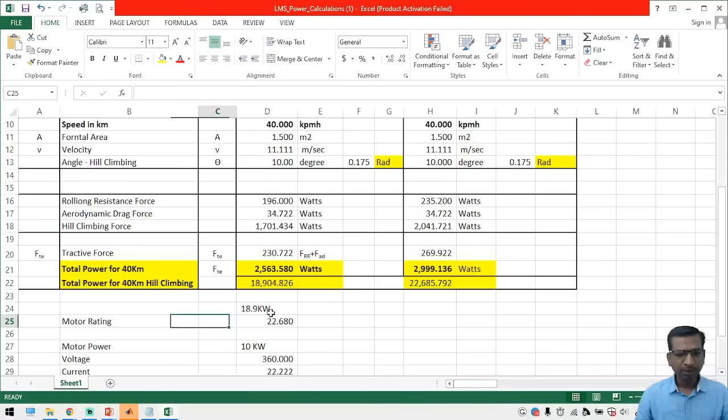As per our calculations, we need 18.9 kilowatt as the motor power requirement, right? So we need 18.9 kilowatt. In that case, how to choose the motor? It should be about 20% higher than this requirement, like 1.2 times 18.9. So this is the exact motor requirement. The motor rating for our requirement is 22.68 kilowatt; that motor we have to keep.

If you keep this 22 kilowatt motor, the entire vehicle can move with its help. Now, are we going to consume the entire 22 kilowatt in this EV for the entire travel time? No, we won't consume the entire 22 kilowatt. Then how do we consume the motor power? Let us understand this. There are two types of loads, right? So how will you consume the load?

Actually, with instantaneous power, sometimes it will be, let us assume, 50 percent. Sometimes you may go to 20 percent, sometimes 100 percent. This is called instantaneous power; let us take it as dynamic power. Instantaneous power is how much power you consume at a particular time. Power is the product of voltage and current, right? When you change the PWM, we can change the voltage, and at the same time we can change the current also. That is the closed loop control mechanism for motor control.

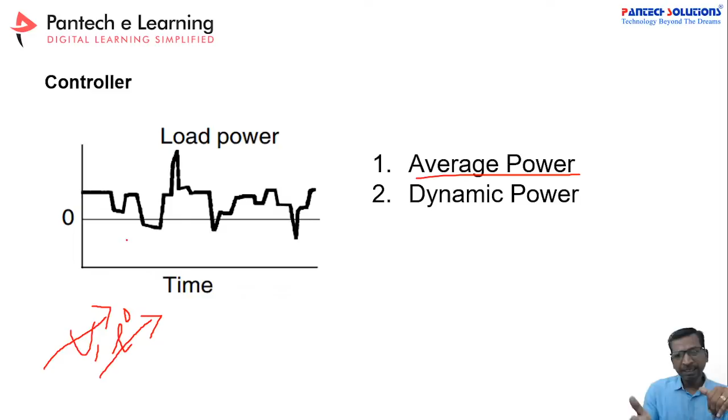Now if you average the power over the entire travel time, it will be like a summation of the entire dynamic power. To understand the average power and dynamic power, people use the drive cycle. In MATLAB Simulink you will get a drive cycle. In the day one class I showed you a reference speed and actual speed. Similarly, just a second, I will show you one more graph. This is called a drive cycle, a standard drive cycle. Based on road conditions and driver data, they have given us a drive cycle.

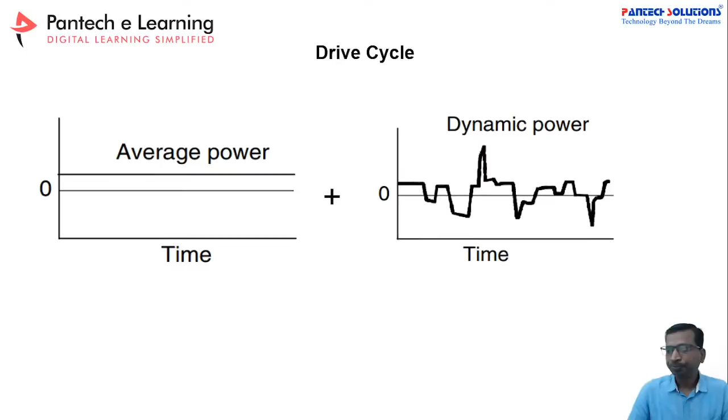So now, how has this motor in a conventional vehicle and the IC engine been connected? Generally, there are different types of hybrid methods. In the earlier stage, there is the IC engine part and then the electrical part. This is called the series hybrid mechanism. Anyhow, the transmission mechanism will be used to transfer the mechanical power, right?

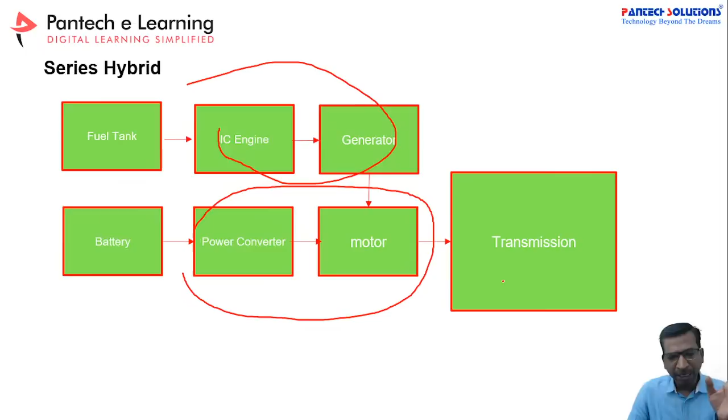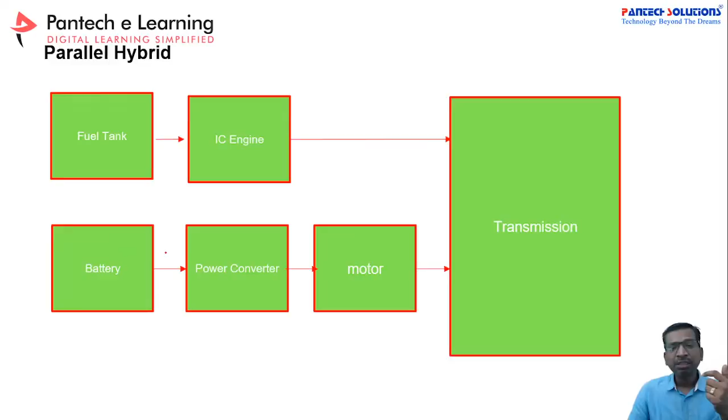Similarly, the parallel mechanism. The IC engine will apply power separately, and the electrical power will apply separately. So the driver can take a call on how the things need to be connected. Similarly, you can go for the series and parallel hybrid methods also. So first one is the series, the second one is the parallel, and now this is the series and parallel.

Frankly telling, by combining this hybrid technology, you are increasing a lot of complexity. Now a lot of latest technologies are available to convert a vehicle into a computer. So it will be like a high-end robotic, high-end computer on the wheel, right? That kind of technology is available.

To understand those concepts, you must know very clearly about the battery, power converter, and motor control. Here the power converter will play a role through controlling methods with the PWM, right? So now are you ready to learn the concepts of the PWM?

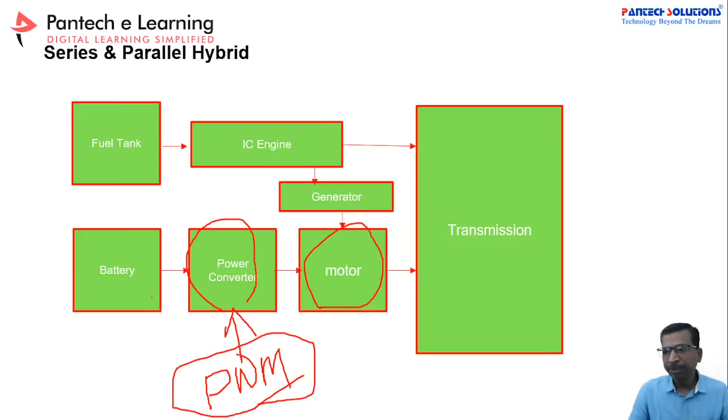So now let's move to the power electronics block. Before getting into power electronics, I should give you the PWM. See, this is yesterday's question.

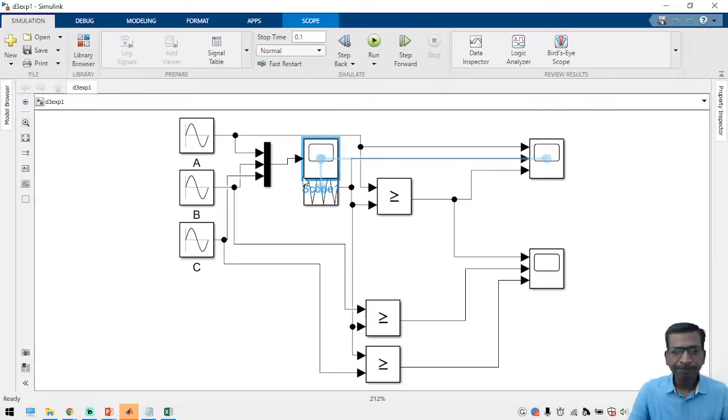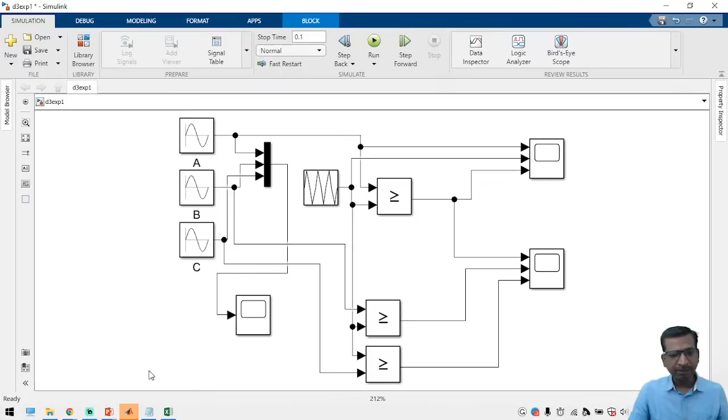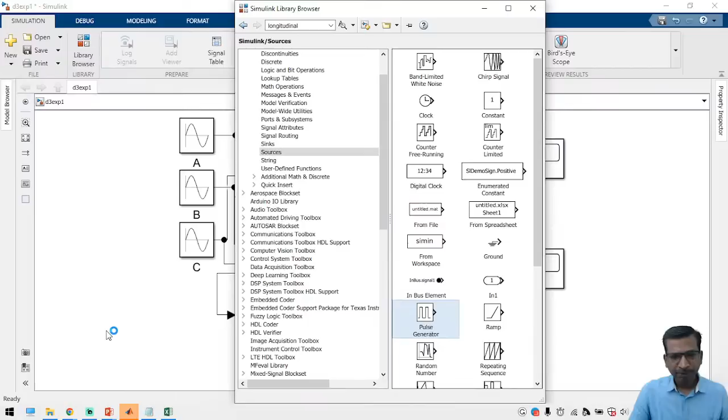So now let us move to another type of waveform. This is called a square pulse. For generating the square pulse, again just open the library browser. Just go to the sources and take a pulse generator block, right? Just select the component and keep this component in your workspace.

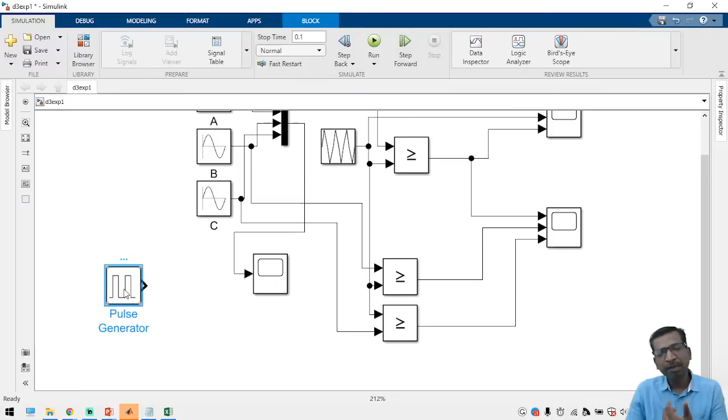Right. So now we have taken the pulse generator. This pulse generator will help us to generate a square pulse. From that square pulse, we can understand how the PWM can start and how the PWM can be used. This is called the basic PWM method. So here the pulse generator will help us to generate a square pulse, right?

This is the time axis; this is the y-axis, and this is the x-axis. Here we are just developing the square pulse. This is the square pulse, right? Now this period is called on time, and this period is called off time. The summation of turn on time and turn off time is called the total time period, right?

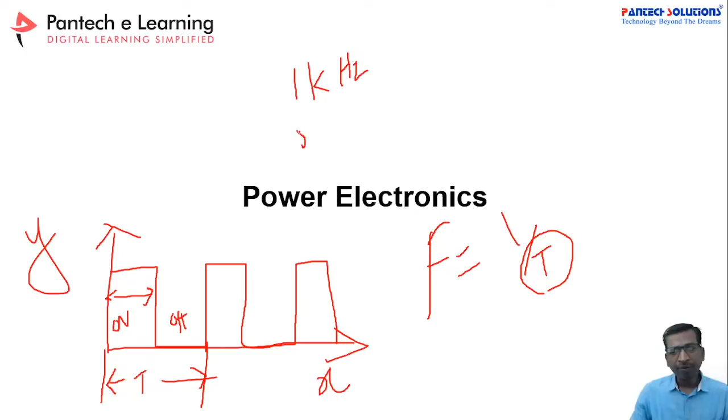So now if you take a 1 kilohertz frequency and a 50 percent duty cycle square pulse. Let's assume this is 1 kilohertz. So 1 kilohertz means the time period is equal to 1 by f, right?

For f is equal to 1 by T. So likewise you can calculate the total time period, and if you want to generate a square pulse, then the duty cycle must be 50 percent. Duty cycle must be 50 percent.

So let us take this graph. Now we are just trying to develop a square pulse. Here the period is nothing but a time in seconds. So here you have to mention 1 by the frequency, right? So 1 by f. Here frequency is 1e3, 1 kilohertz.

And after that, pulse width. If you keep here 50 percent, then the square pulse will be there. Keep 50%, then you will get a square pulse. Just apply here and try to understand the square pulse. Just change the layout. Just give me a second. Yes. So now just try to run this simulation.

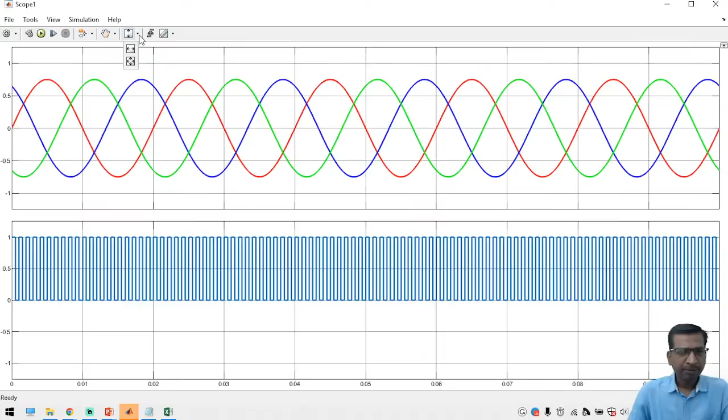Here we are getting the square pulse, right? I will increase the value of the graph. See here, 1 kilohertz is the frequency of this square pulse. So exactly 50% is the on time, and 50% is the off time, right?

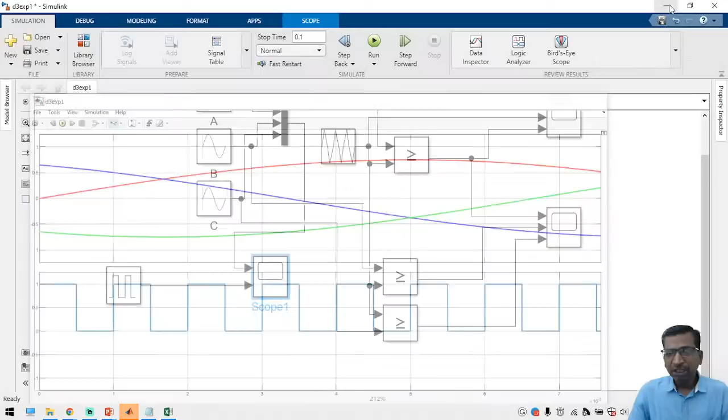So now, if you want to change the duty cycle, you have to change the value here. Instead of 50, if you apply 25 percent, then 25% will be the on time, and the remaining 75% will be the off time. So like that you can change the PWM.

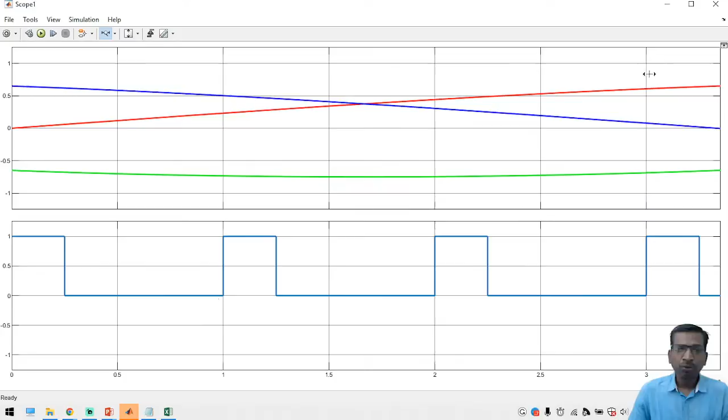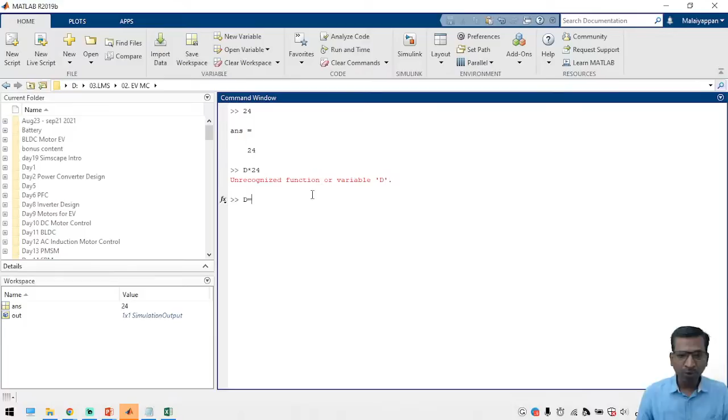So now the logic is, the output voltage: for example, if the input is 24 volts, output will be the duty cycle into 24 volts, right? Now we have kept D as 25 percent, which means a 0.25 value. So the output will be D into 24, approximately 6 volts output voltage.

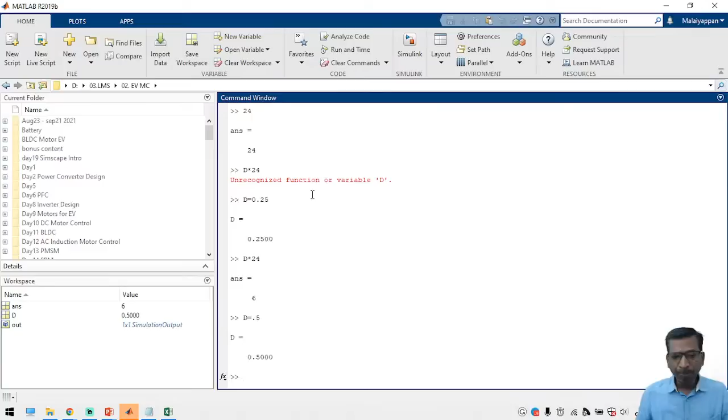Now you have a choice to change the duty cycle. If you change the duty cycle to 0.5, then output will be D into 24. So exactly you will get 12 volts. So by this method we can change the voltage.

How you can change the speed of the motor, I will tell you in the next experiment. By changing the input terminal voltage, we can change the speed. So obviously this is the very basic speed control technique. So now you are in the position to change the output voltage. Theoretically, if you change the duty cycle, you can change the terminal output voltage.

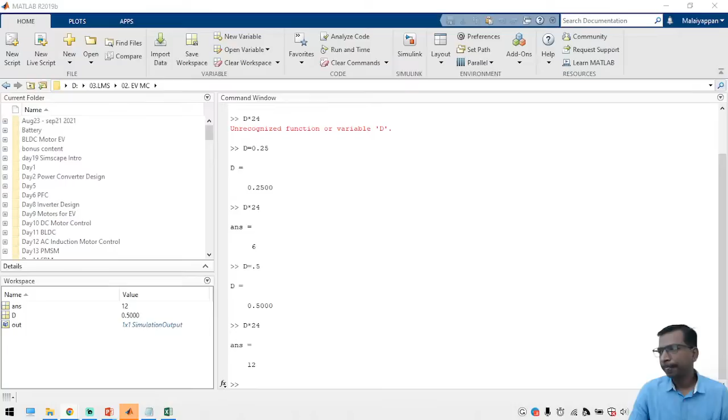For the three phase, we need 120-degree phase shift. Right. So now let's move to the next topic. So actually, we have covered the basic waveform generation. So here with the waveform, how we can control it.

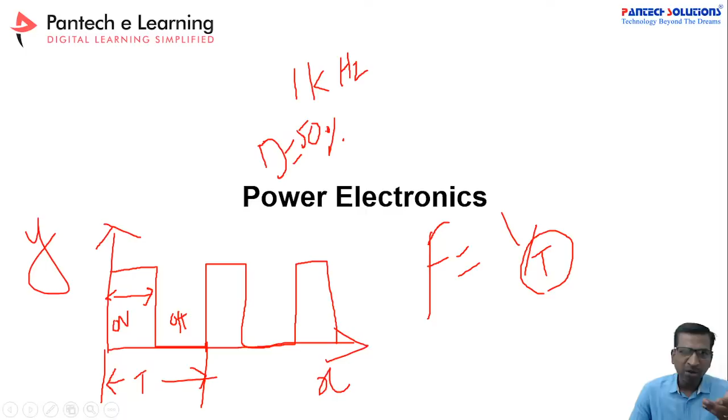So for controlling the output voltage, you must know what is power electronics. So as of now, just keep this point in your mind. Power electronics is the application of solid state electronics to control and convert the electrical power, right? Which means that here some logic will be there. So here we are applying the input, and here we are taking the output, right?

So here we will apply a PWM. So this logic will be based on the solid state devices. I will tell you what the solid state devices are in the next classes. So just keep in mind, here we are using some electronic circuit to convert the input power to the output power with the help of PWM control.

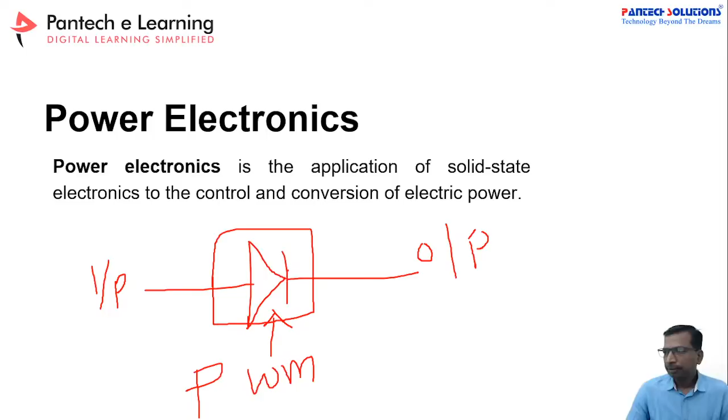Now you must tell me what is the difference between basic electronics and power electronics. Do you have any idea about it? What is the difference between basic analog electronics and power electronics? I'm just waiting for your reply.

High voltage in power electronics. Exactly, Mr. Lokeshwara. The basic electronics will handle up to a maximum of 12 to 24 volts. Whereas if a particular circuit handles more than 24 volts, everything comes under the power electronics domain.

Now you must know the basic components of power electronics. As we know, a transistor: BJT, JFET, and then MOSFET. These are all electronic devices, and they're called solid state devices. And how can you break the circuit? If you have a breaker in the circuit, you can easily break it. That's a manual breaker, right? If you manually lift the breaker, the circuits will be isolated from each other.

Similarly, you have another kind of breaker called a mechanical relay. If you apply a control voltage to the relay, then the contact will get removed on this line. So that is called a mechanical relay. Similarly, electronic relays are available. That is called solid state electronics.

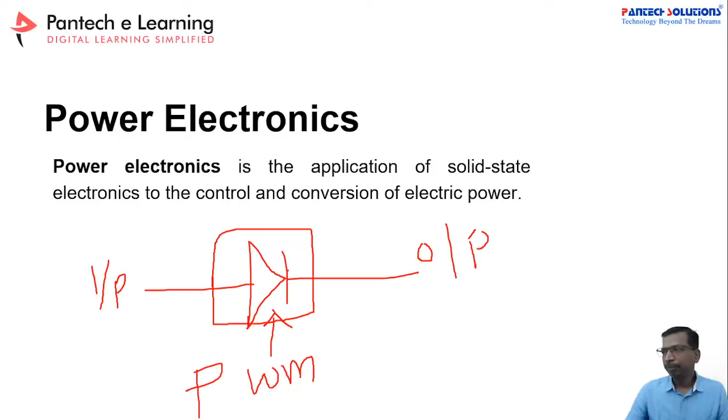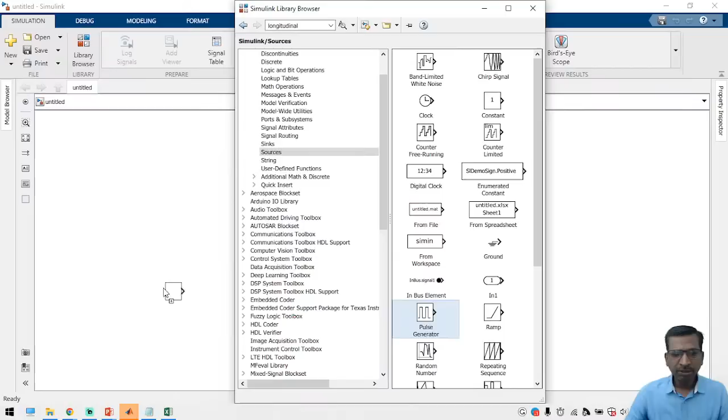Now let's move to the next experiment, and let's have a counter design. I will show you one counter design. Then we can go for the motor control, right? So how can we count the pulse? Let us take the same square pulse, and the time period is 10 seconds. So now we have to convert the square pulse into exactly 50 percent, right?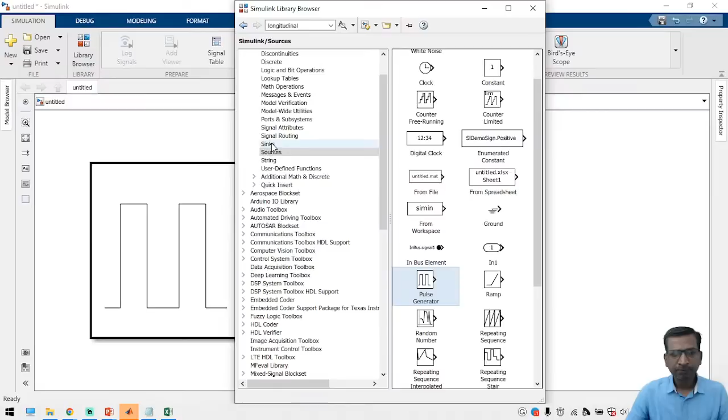Right. So 10 seconds we are going to run this one. So just take the scope. Where will you get a scope? Here, just take the scope and connect the scope, right? So if you run this, you run the scope, you run the simulation. See here, you can get square pulses, right?

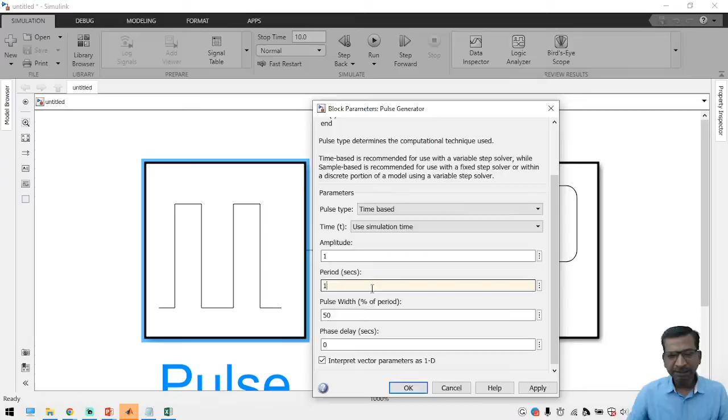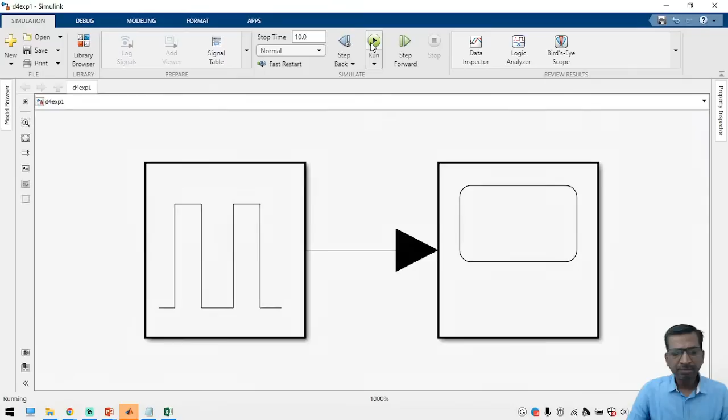So now I'm just going to reduce the time period. So for the 1 second, one pulse should generate, right? Just save the simulation, and now you can run the simulation. See here, we are getting the 10 pulses. So this is pulse 1, and then pulse 2, pulse 3. For 10 seconds we are generating pulses, right?

So now, how can you measure the motor speed? Do you have any idea how you will measure the motor speed? So in the motor shaft, you should have a sensor. That sensor will give you the square pulses. So now electronically you have to count the pulses, right?

So the tachometer is an instrument. That instrument you cannot use in your control algorithm. So you should have an electronic circuit, and generally we will use an optical sensor, generally called a speed sensor. If you keep the speed sensor on the motor shaft, the sensor will give you the square pulses. So you have to develop a program in the microcontroller. That controller should measure the speed, the number of pulses in a particular time. For that reason, you need a counter program, right? So now we are going to use the counter logic.

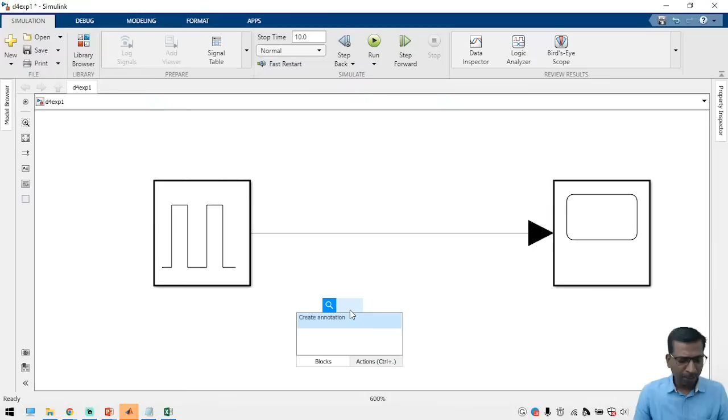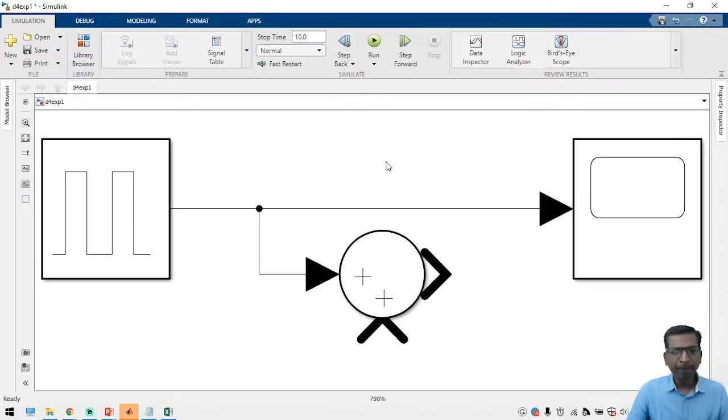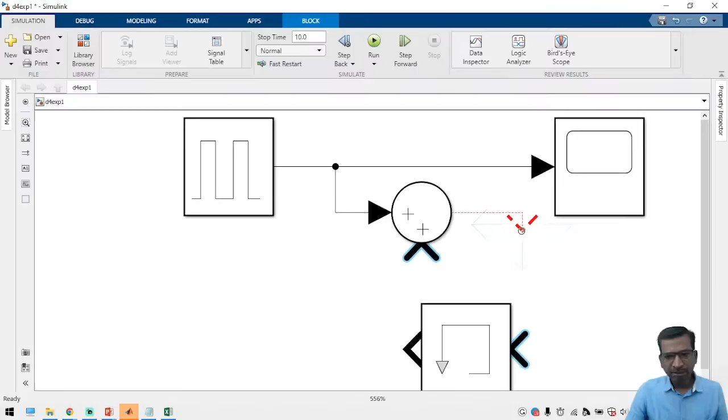So how can you measure the pulses, right? So here take a sum block, connect it here, and take one more block called memory. Take this memory block, rotate the block, and connect it here. Now we can measure the number of pulses, right? Take a display block.

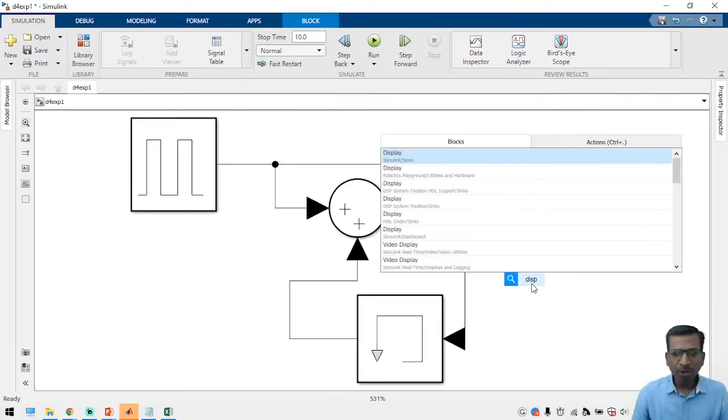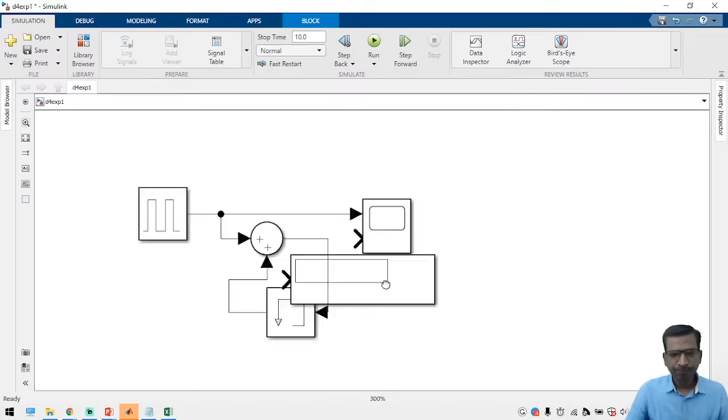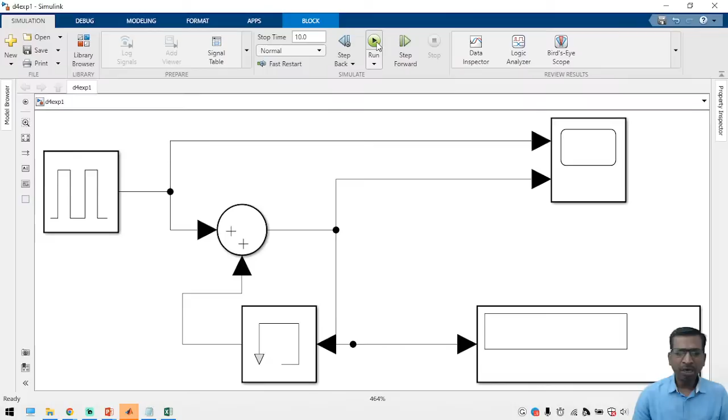So now we are going to measure the pulses. How can we measure the pulses? Please wait, I will tell you. Change the layout so you can easily grab the results, right? Just try to run this one. It will give you a random value. So here we have to change the sample time. I will tell you how to change the sample time. Run this. Here the program is counting some value, but this is not the exact one. So now you have to adjust the sample time.

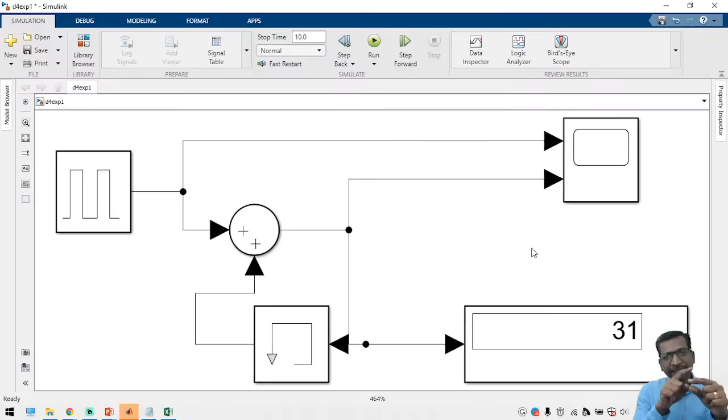Generally in the electronic circuit, the ADC, that is the analog to digital converter, is used to measure real-time parameters, because the motor speed is a real-time parameter. In that case the sample and hold parameters may be involved in your algorithm, right? So what do you mean by sample? If you take a continuous signal, you should identify this is one pulse and this is another pulse. If you take 2 samples per period, then you can easily identify the logic. If you take the sample at this moment and at this moment, you can easily calculate the pulses. If you increase the samples within this second, it will give you a faulty result.

So now I am just going to adjust the sample time period. How can you adjust the sample time period? Again, just go to the configuration parameters and here change the fixed step.

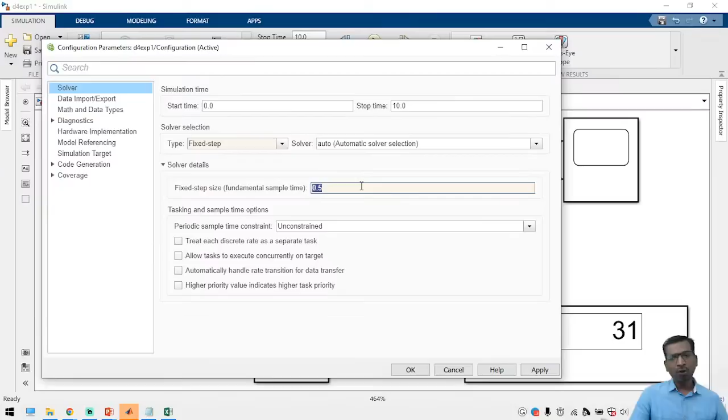Here you have to change the sample time. As per our design, 1 second is the time period. If you keep the sample time as 0.5 seconds, that is enough to identify the logic. Now we are getting 31, but by default it's only 10 pulses.

Now we are getting 11, so the next pulse is also going to be calculated. For that case, you have to run this simulation for 9.9 seconds.

To run this, you will get exactly 10 pulses: 1, 2, 3, 4, 5, 6, 7, 8, 9, 10. So this block will give you the exact value of 10.

So by this method, you can develop the logic to measure the speed of the motor in real time.

Can you just tell me what is the confusion? I will try to answer your question. Just share me the question, and I will try to give you the answer.

Sample time should be the same as the cycle? No, it's not. Sample time is the parameter you need to calculate it, so that value should be less than the time period.

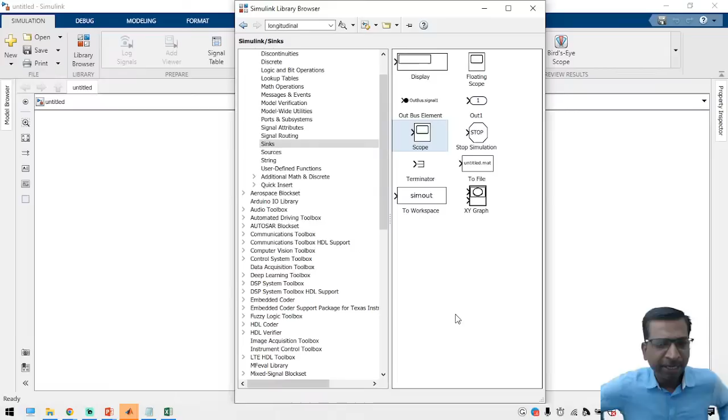So here one more experiment is there called DC motor identifications.

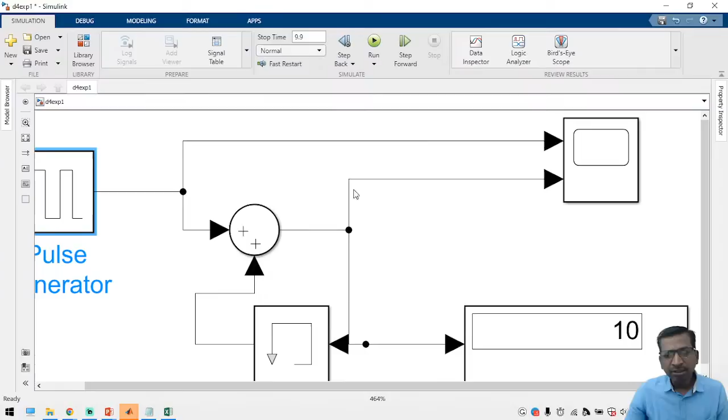To show sample time explanation on the scope: if you take a simulation, this is one software, and that software will have some code in the backend. Here we are applying continuous signals, and now the logic has developed to identify the signals.

If you take this graph, this is one period, so one time period is 1 second. Now your task is to count the pulses. How many pulses are here? For 10 seconds, only 10 pulses are there.

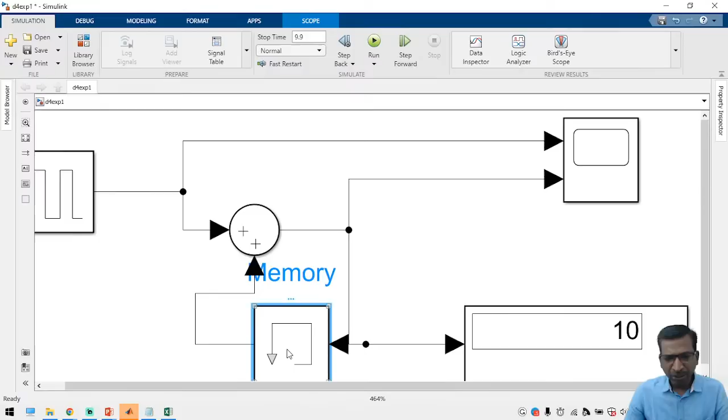So now you have to develop a logic to count the pulse. One pulse will come and it will add. Initially the memory block will be 0, so 0 plus 1 is 1. After that, this data will be stored in the memory.

So the next sample, what will come? 1 plus 1 is 2, and that is stored in memory. In the next interval, the sample value for the entire period will be 0, so the 2 will remain, and then 2 plus 1. This 2 will be stored in memory, and then 2 plus 1 equals 3, and the process continues till the end of the period, and finally you get 10.

Because we are having 10 pulses, yes, here we are having 10 pulses. I hope you understood the concepts.

So the memory block is used to store the previous data.

Memory block is used to store the previous data. As we have triangular pulses, why do we need rectangular pulses?

Actually, each and every pulse is a separate logic to implement in the PWM controller. So for implementing motor control, we will use the motor PWM logics.

Is there any possibility to start an internship in this area, PV and wind hybrid? Yes, we have a renewable energy internship.

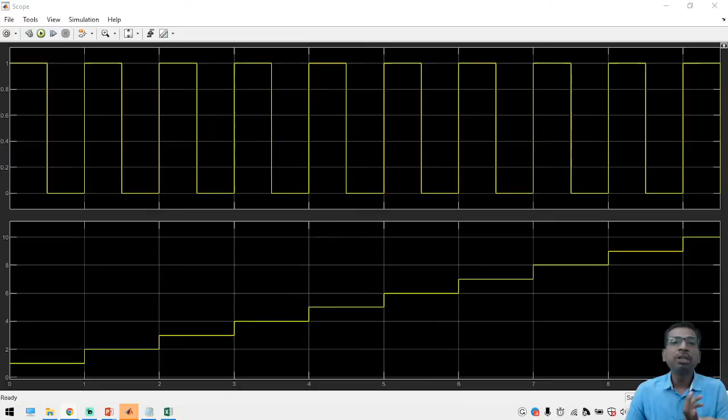Why do we count the pulses? This is a counter pulse, an example of how to count the pulse. So in that case, you use this logic to count the pulse.

Mr. Akshay, we are going to develop logics. We are going to develop closed loop applications.

Does it count for the negative? You have to identify the logic to count the negative pulses also.

Akash, yes, we have a project closed loop application also scheduled.

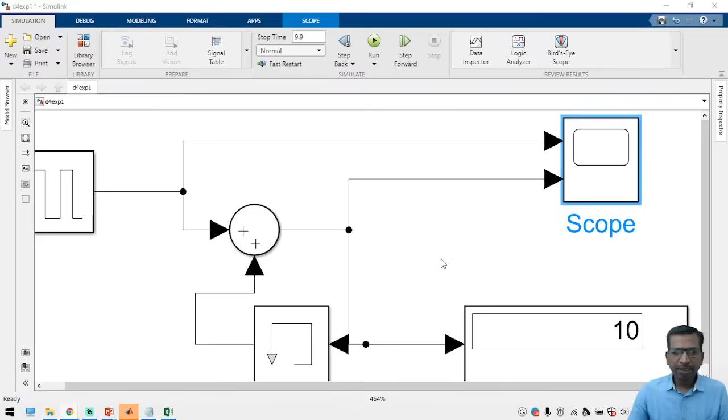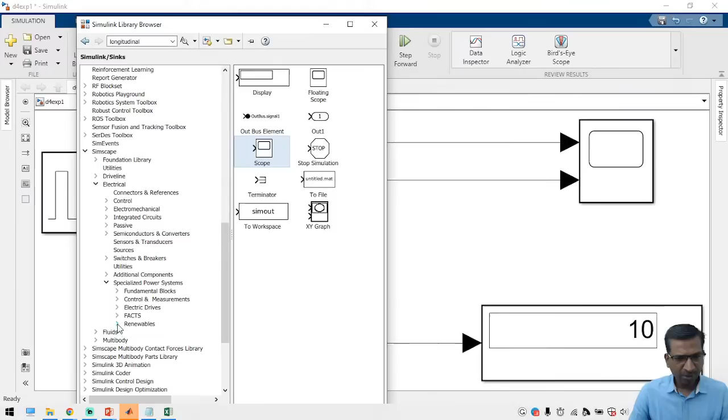One more thing, in the library there is a DC motor. I will show you the demo for the motor. Go to Simscape, Specialized Power Systems, Fundamental Blocks, machine. Here we have a DC motor.

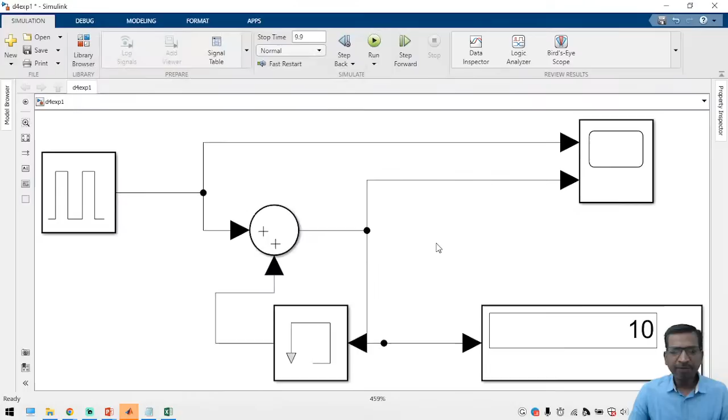So for this DC motor, we have to develop a PWM and then output input voltage, and by that time you will use these logics to control the motor.

Benjamin, use any other latest software, latest versions. Then only you can use that one.

Can we use different pulses in the one model? Yes, you can use any different pulses. Actually, everything you have to develop as a logic.

How to measure the motor speed? Actually, in the simulation we have a model, whereas in the practical case, you have to use a sensor like a speed sensor.

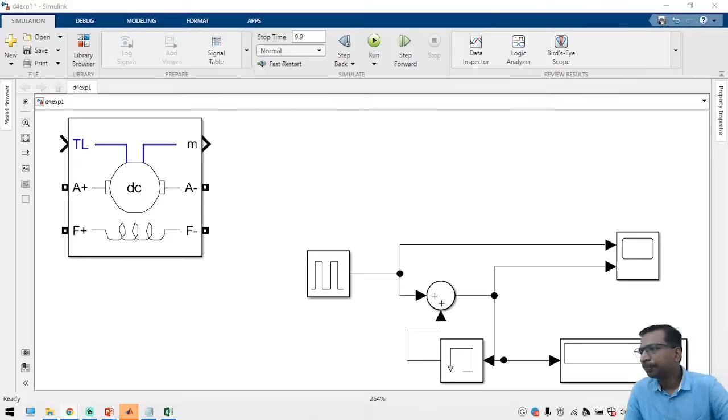We can, in short form, summarize the complete concepts of today's class. Somebody is getting a little confused, so let's see here.

So here we have to apply a motor, because then only we can get mechanical power. So the motor needs a control model. So here the pulse width, that is called PWM, needs to be applied in the power electronic circuit. I will tell you what the power electronic circuit is in the next class. So the PWM needs to be there.

So how can you generate a PWM? There are different methods. The first one is you can use square pulses, or else you can use the sine wave and the triangular waveform. From that you can apply a PWM.

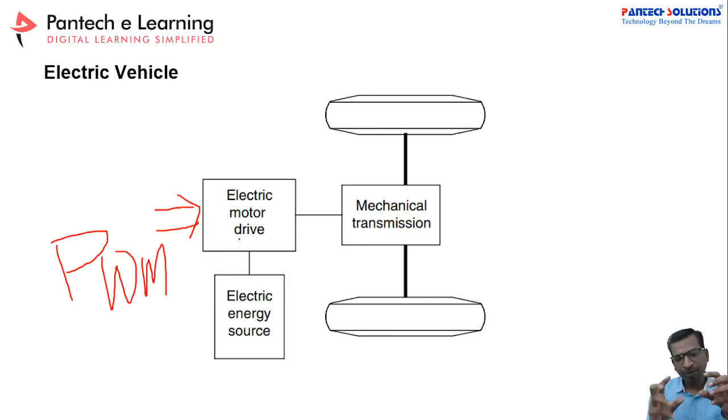Once you develop the PWM, the motor will rotate. So here you should measure the motor speed. This motor speed should return to the PWM. Then only the motor will work in a stabilized manner. Otherwise, you cannot get stability.

So now you should know how to generate a PWM and how to measure the speed. So these are the two different concepts we have discussed today.